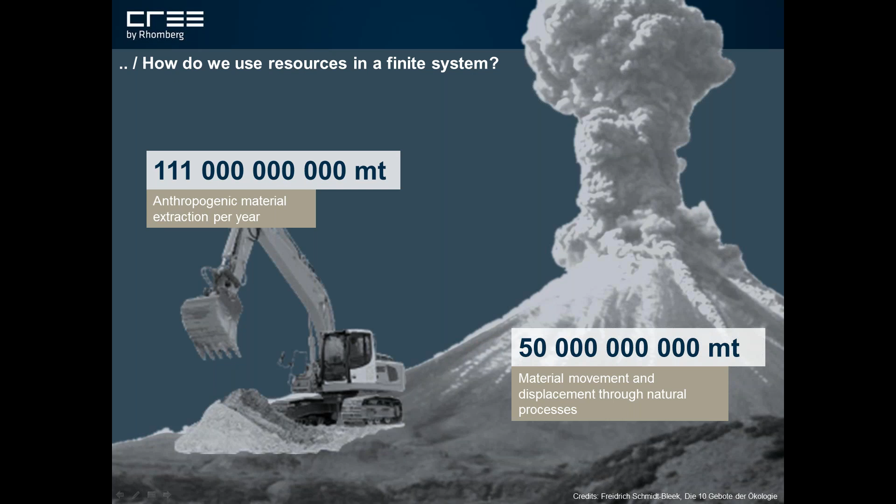Let's have a look at a bigger picture. Each kilogram of industrial products is responsible for an average of 30 kilograms of nature. This is not only the stuff and the waste that goes into the product itself, but also the energy that is used to transform natural ingredients into technical materials.

To relate this resource consumption to the environmental impacts that you might be more familiar with: just around 150 years ago, we as humans have been able to increase our ability to extract energy from the environment beyond the intake of food and the use of fire. In context of human history, the discovery of coal, gas, and oil seems like the blink of an eye.

Those fascinating fuels store billions of years of solar energy in a very dense and portable form. Just imagine yourself pushing a car 15 kilometers along the road, uphill and down - this is the service of 1 liter of gasoline to us.

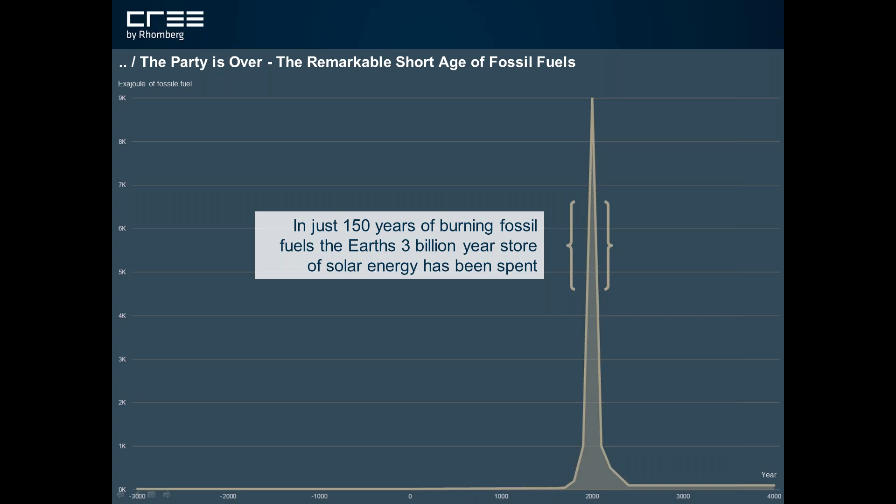Very soon we'll have used up all economically viable reserves. Let's try to keep this valuable stuff for the common good and emergency services in the future, and let's build our buildings with renewable resources. As one of my favorite writers on resource issues, Richard Heinberg, puts it, the party is over.

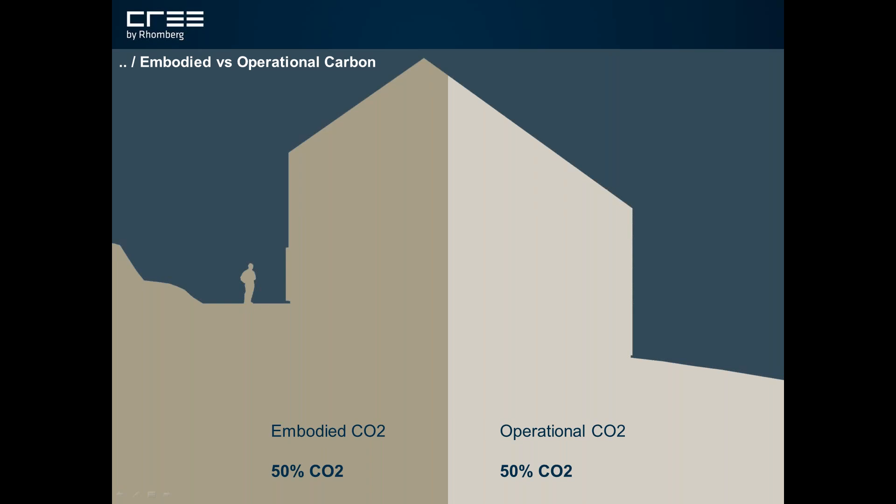So this diagram before suggested that the energy is the devil, and it is in a way, but we have to look beyond the obvious, we believe. As building design is moving towards high performance in regards to envelope and operational energy, like passive house or net zero, the embodied energy suddenly makes up 50% of the overall impact or even more.

And when you look at those emissions over time, you see that the first 50% of those carbon emissions are being released at day one or even before you build. And the second half then comes over time, over the building life of 50 or 60 years, depending on the definition of where you live.

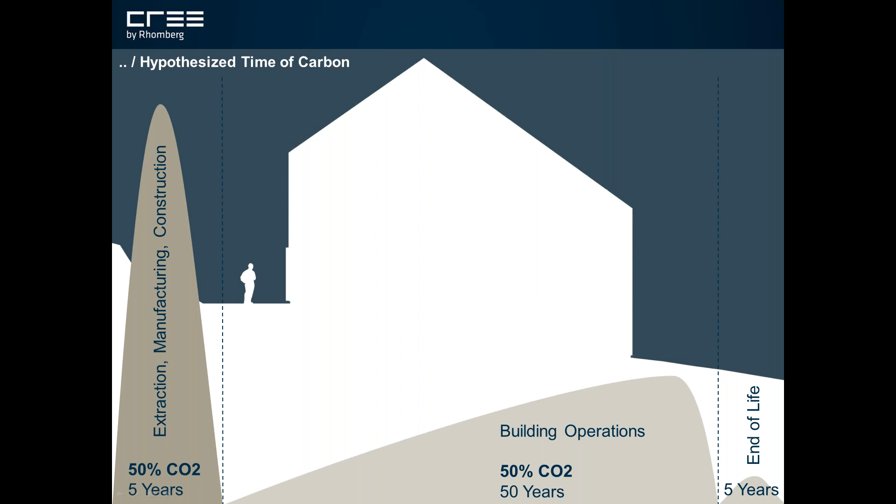And you might even hope during that time for more efficient energy generation technologies to be developed. So the one-sided discussion on energy and greenhouse gases distorts our view of the urgently needed radical reduction of consumption of raw materials. And it is the material consumption levels that presuppose the use of fossil fuels with its known impacts. To achieve the same kind of service levels and comfort of the current high consumption economy for a low extraction future, we need to dematerialize our economic processes in a controlled manner.

Metrics and action plans have actually been introduced and developed during the last 25 years by an international science community around the world. Well-known scientists like Amory Lovins, Richard Heinberg, Friedrich Schmidt-Bleek, and others clearly show a path on how we can redesign industrial production and improve resource productivity 4, 5, or even 10-fold.

Every material, product, or service can only be provided by interfering with the ecosphere. So let's take a computer, for instance. For producing this product, you need material from nature and you need energy. Many different materials from many different countries have to be mobilized in nature, extracted, processed, transported, and finally turned into thousands of different components needed for the computer. Equally, in order to make energy available, you have to invest materials like steel, copper, oil, and sand, even for harvesting solar radiation.

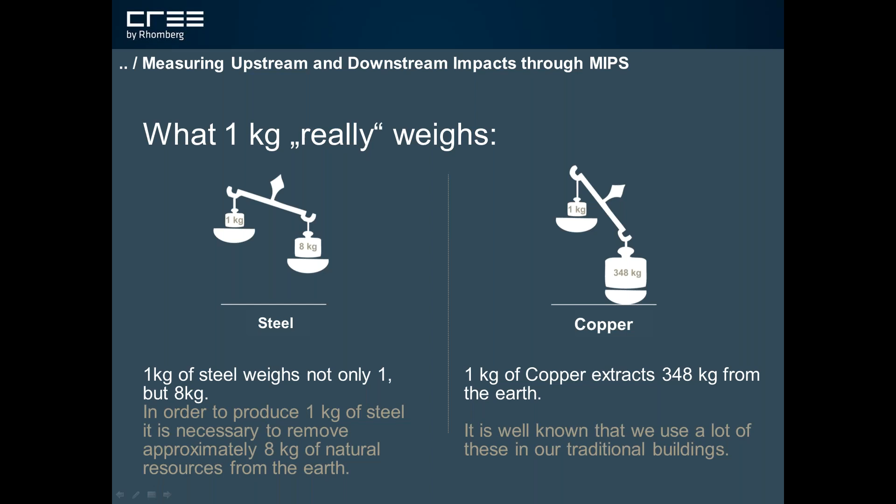So resource productivity and dematerialization is the perspective that we're using and implementing in regards to building design. Our building design decisions are driven by looking at optimizing the resource performance throughout the building life cycle.

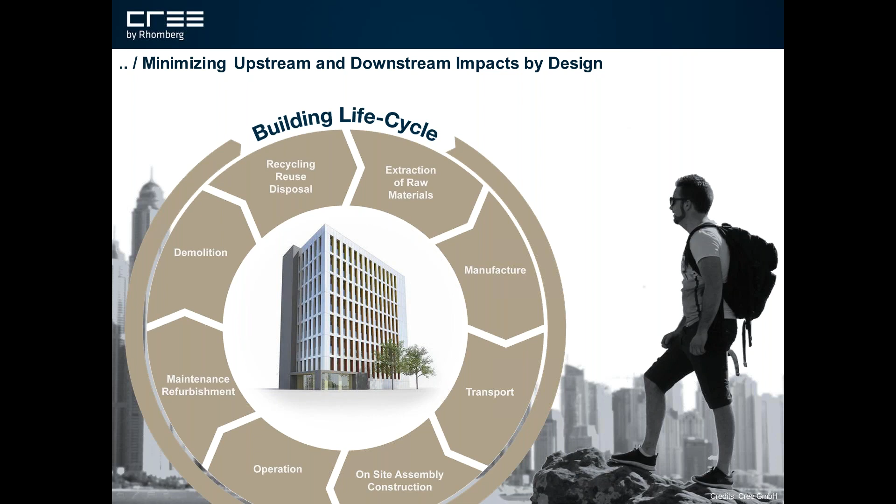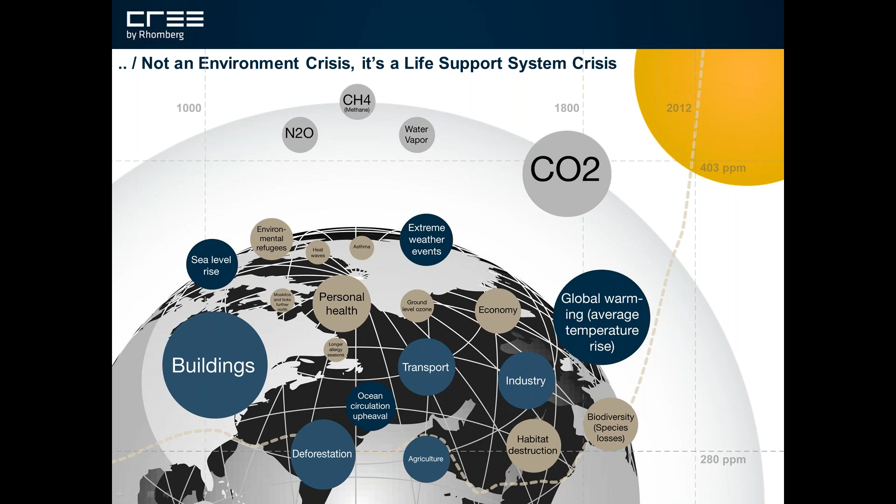So unfortunately, we're living in an era in which the existing systems are reaching their limits. Endless growth cannot persist in a finite ecosphere. It is actually those natural systems that support our basic human needs and life on this planet that we enjoy so much, like the clean air, the protecting atmosphere, nutrient cycles for food production, water systems, and biodiversity, that are being altered dramatically by this accelerated resource use nowadays.

So being the master of glass, steel, and light, the materials of his time, visionary architect and designer Richard Buckminster Fuller is often cited with the sentence, 'How much does your building weigh?' This is exactly the question that we're trying to answer during building design.

The ecological rucksack is a simplified proxy method to assess the impacts of products and services over the whole life cycle, from resource extraction to the end of life. And there are also other more detailed methods available, like life cycle assessment, and we'll talk about those later and learn about implementation in an upcoming webinar.

Yeah, so we don't have two planets, so let's plan for the one. And we were trying to do this when we launched the Lifecycle Tower idea. So photovoltaics is great, but we think we can do better than that.

Carbon is a key component of all known life on Earth. Climate change is the result of breakdowns of existing carbon cycles that were basically balanced for thousands of years, and these breakdowns are caused by us, so it's a design failure. Greenhouse gases extracted from their underground storage and put into the atmosphere make airborne carbon a material in the wrong place, at the wrong dose, and the wrong duration.

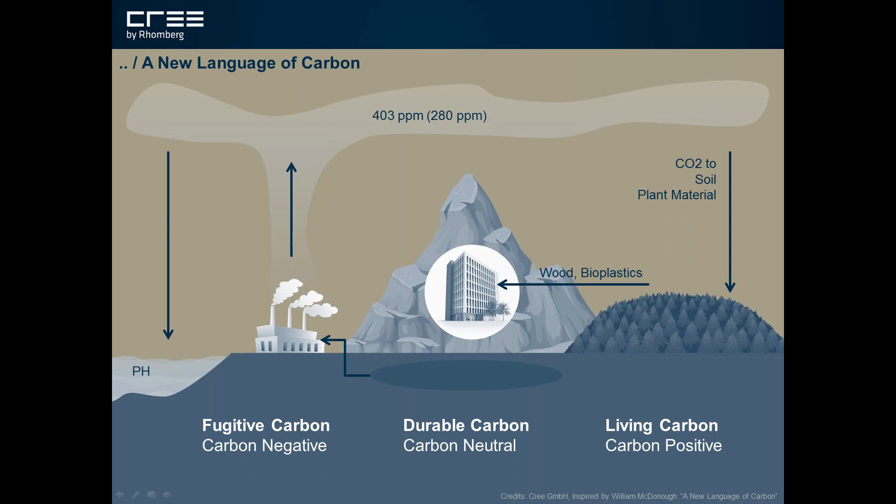So we look at wood from the perspective of avoiding carbon emissions from other forms of construction, but as well from the point of view of a potential carbon sink. We use visible wood in the support structures as much as we can. We just don't want to encapsulate it, for obvious reasons.

Reconnecting human beings with natural systems has all kinds of positive effects on their life. For example, these are just some bullet points from the research during the last two decades: there's lower blood pressure, lower heart rate, faster recovery from illness, lower pain perception, better creative task performance, better concentration task performance, and so forth.

But I personally think that we are in dire need for connecting to natural systems that go beyond the effect of worker performance and accelerated healing times. I think we need to do this to appreciate and value those systems that support our lifestyle. There is more literature on this topic, on the topic of biophilia, in the resource section as well, when the handout will be available.

With the accelerated demand for tall wood structures, legislative bodies will be put on the spot to increase legal certainty through evolving building codes. Some countries, states, and municipalities are now moving into standardizing the codes for taller mass timber structures. Today, in most jurisdictions, all buildings over 6 stories still have to be legally built with concrete and steel. Meeting certain provisions and proving equivalency, you can build with mass timber nevertheless.

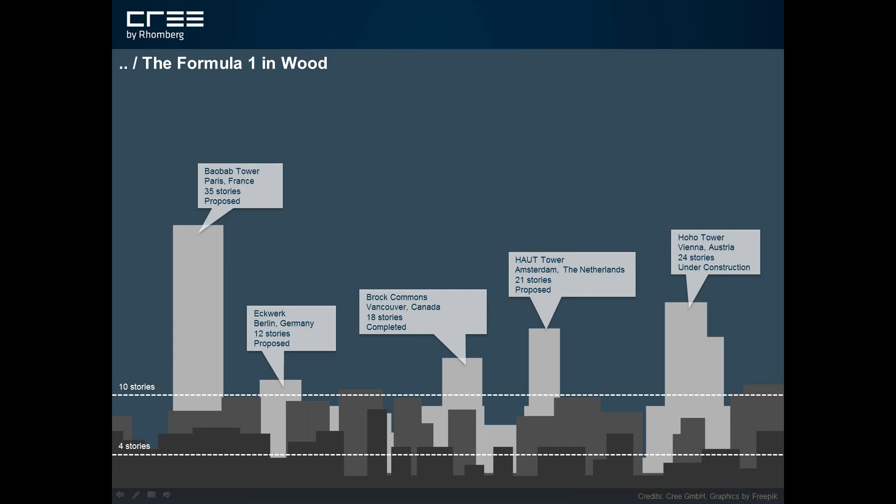These super tall projects do not really represent a fair share of the market yet, but they attract a lot of media attention, which is a good thing, as those projects will drive innovation in technology and help develop a level of confidence. If we really want to make a difference, we want to tackle buildings between 4 to 10 stories, as they make up the bulk of new urban construction. It is also this building height that offers a sweet spot in density for various reasons, from potential energy independence, transportation effectiveness, sense of community, access to nature, as well as comfort and resilience.

I'm going to read to you 3 numbers that try to answer the question on the slide, and let's take those numbers with a grain of salt - I have not calculated those myself. The first statement is: the amount of wood used as the main building material for a 30-story Lifecycle tower regrows in the United States forest within 3.5 minutes.

Second, the wood used for the IZM building, which uses the CREE system, regrows within 1 hour in the Austrian forests. And 1/3 of the current forest regrowth in Germany would be sufficient if all new construction in that country were built with wood. So let's not use wood as fuel - let's have it go through a durable phase, or as many durable phases as possible, before that.

The use of wood for buildings in ever larger volumes needs to go along with responsible management of our forests worldwide. There is a lot of potential for reforestation in areas that have been harvested and transformed during the last 500 years. So from my European perspective, the Mediterranean comes to mind.

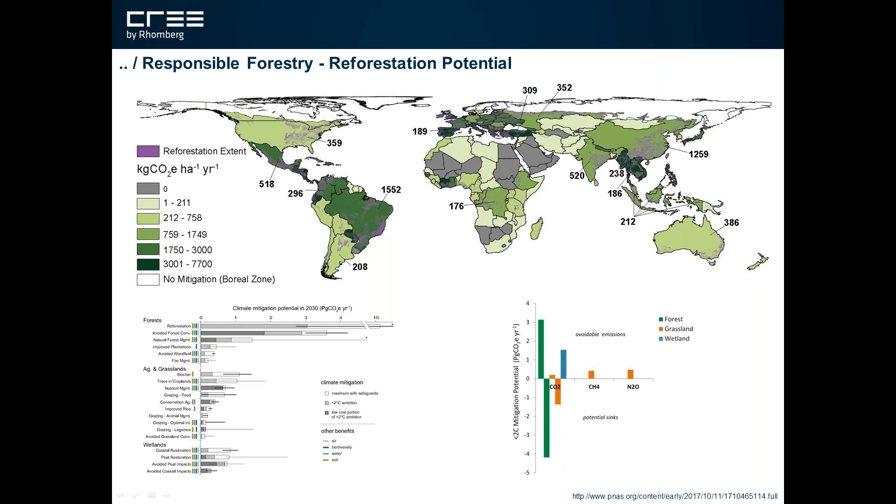Centuries of deforestation have turned Spain's lush forests into barren scrublands, making them vulnerable to erosion. The same applies to many other areas in the world - tropical forests especially are of concern. So wood is the best material available to us, but we still want to be very mindful in its use.

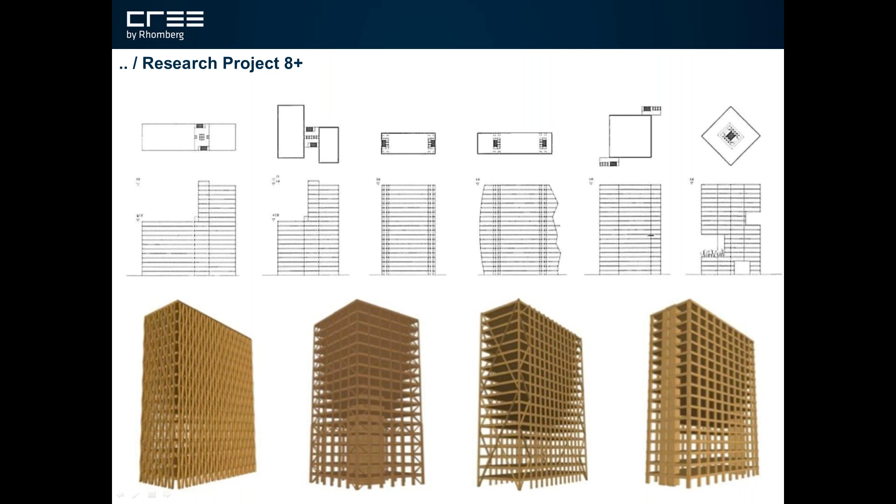As a first step in the founding of CREE, the technical feasibility of buildings in timber construction was investigated as part of the so-called 8+ research project, which began almost 10 years ago in 2007. However, this did not take into account the commercial marketability of the developed concepts or its chances of obtaining approval under construction law. Following that first step, our cooperative and multidisciplinary research project called the Lifecycle Tower Project was initiated under the lead management of Rhomberg Construction.

It was basically proven on paper that you can build 100 meters tall with wood. So 10 years later, we not only have written results, but also the proof. We will see project examples in a moment.

CREE is rooted in the region's tradition of building craft and local materials. The company CREE that I'm representing today is a startup spin-off from Rhomberg Construction and is based on the Lifecycle Tower Research Project. CREE stands for creative resource and energy efficiency.

Hubert Rhomberg is the driving force behind CREE. Hubert serves as the managing director of Rhomberg Holding and Rhomberg Sersa Rail Group. As a fourth-generation family-owned company, Rhomberg Construction is obviously especially concerned about innovation and long-term planning. He wants to make a difference in his segment.

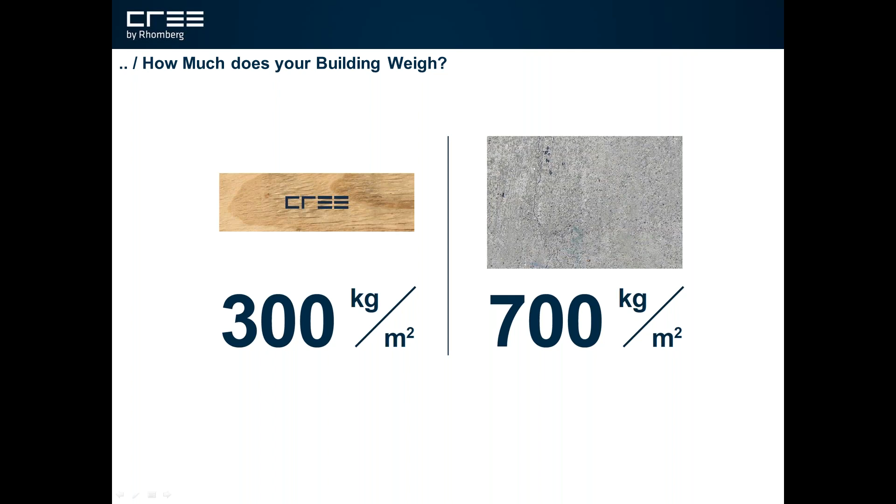The previous structural skeleton diagram was developed asking the same question posed before by Bucky Fuller. We're basically minimizing material resource, no matter if it's the concrete or the wood. We only want to use it where it's actually absolutely necessary.

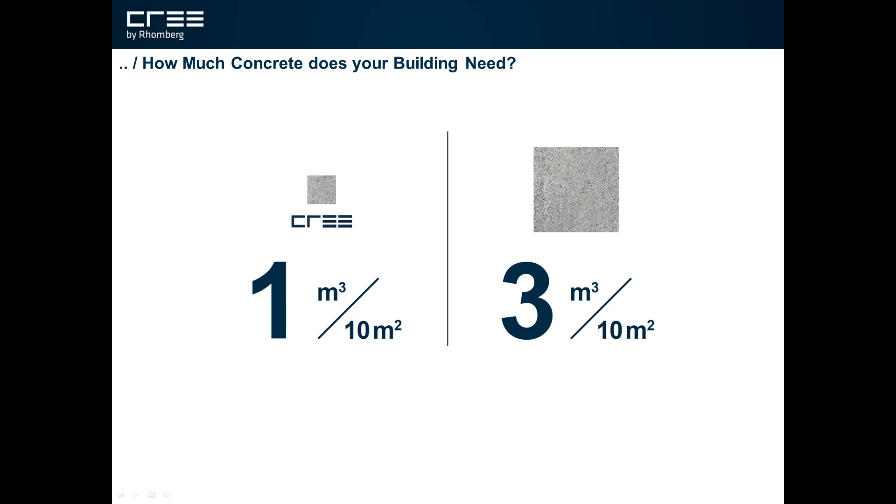For example, the prefab concrete top is only between 80 millimeters to 100 millimeters thick, compared to around 300 to 350 millimeters for similar spans with cast-in-place concrete skeletons.

Through that, we reduced the carbon from less concrete, and with sequestration in the wood, by 80% for the structural system.

The concrete creates the non-combustible layer separating the individual stories. Together with the glulam beams, composite action is created. How wood and concrete is connected, we see in a moment.

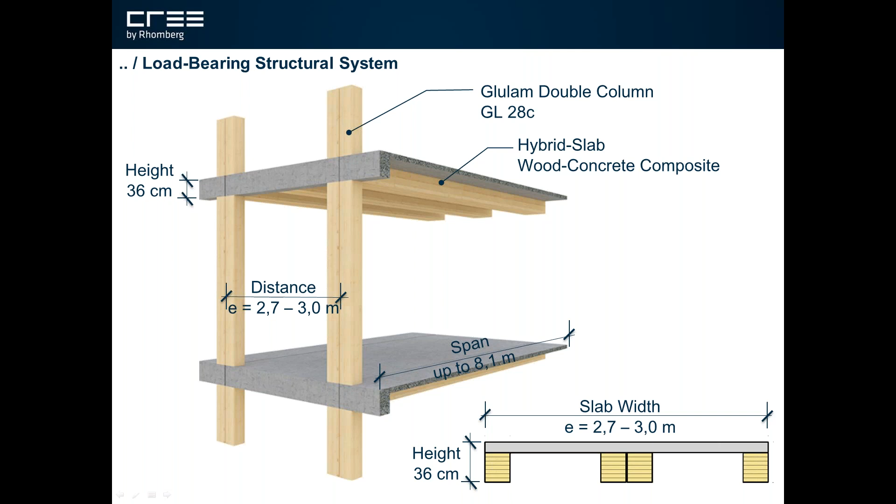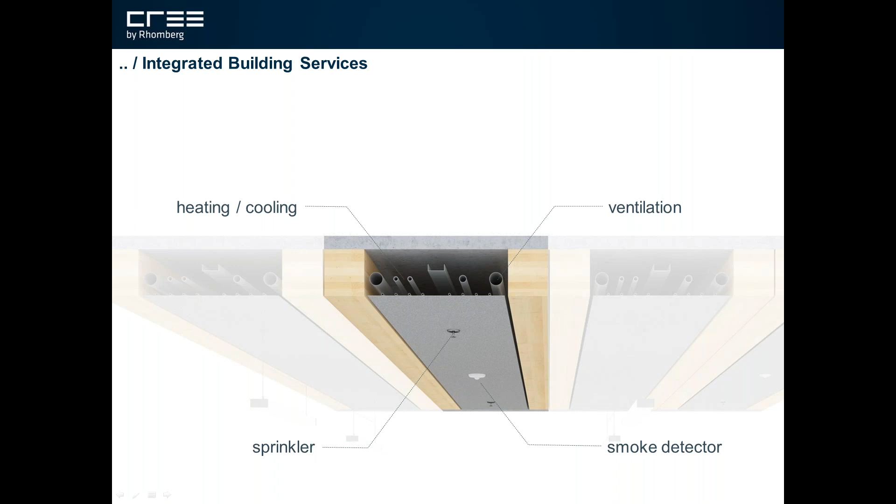All columns in this instance occur in pairs at the junctions between the modules in the facade plane, each one bearing one floor element. The space between the beams provides space for services. Chilled beams provide radiant heating and cooling, and other equipment like lighting, ventilation, smoke detectors, and a potential sprinkler system is also arranged in the void between the beams.

With the next couple of slides, I would like to summarize some of the core aspects taken into consideration when the Lifecycle Tower system was thought up. The system components are intended to be resourced and manufactured as locally as possible. Studies show that the wealthiest economies are precisely those with the highest percentage of locally owned businesses.

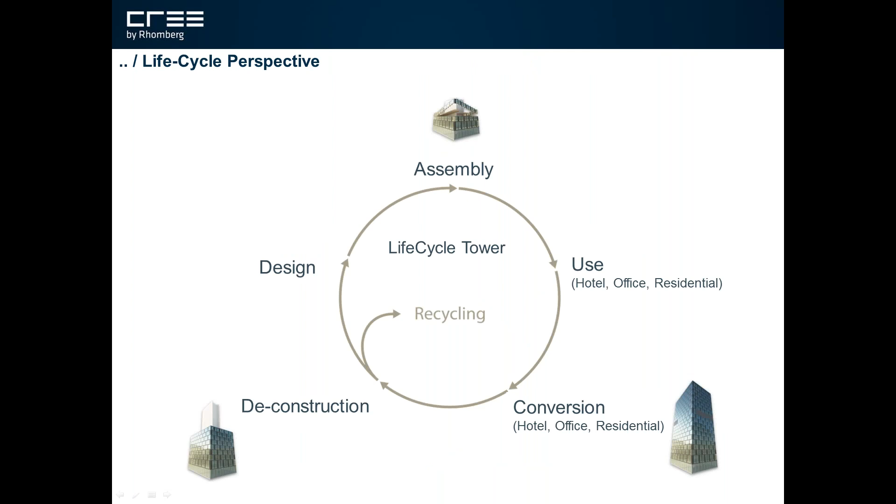We had heard before why lifecycle thinking and systems thinking is so important to us. In a well-attuned process, communication failures between architects, designers, contractors, and procurement teams compromise the successful outcome even more. We're convinced that our aspired outcome will work only if we leave our silos and work collaboratively together from day one.

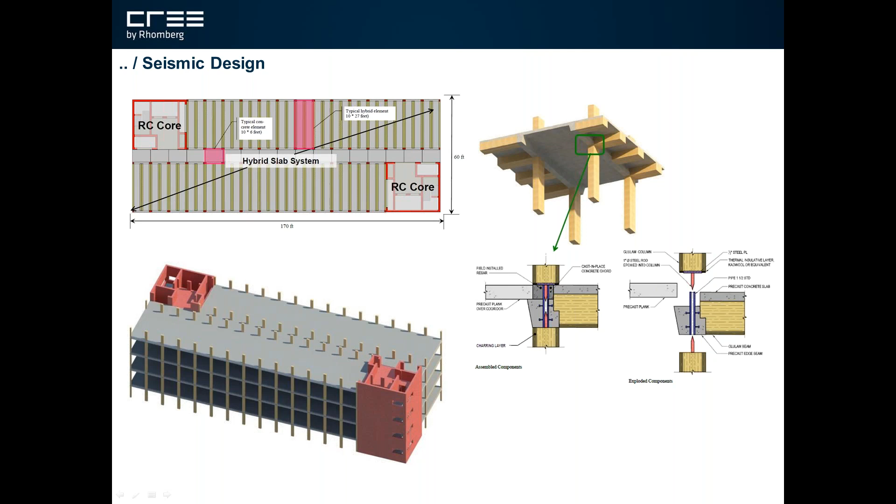So considering different seismic zones, we had collaborated with Arup engineers in the San Francisco office to revisit and adapt the LCT system ideas and approach for high seismic zones as well.

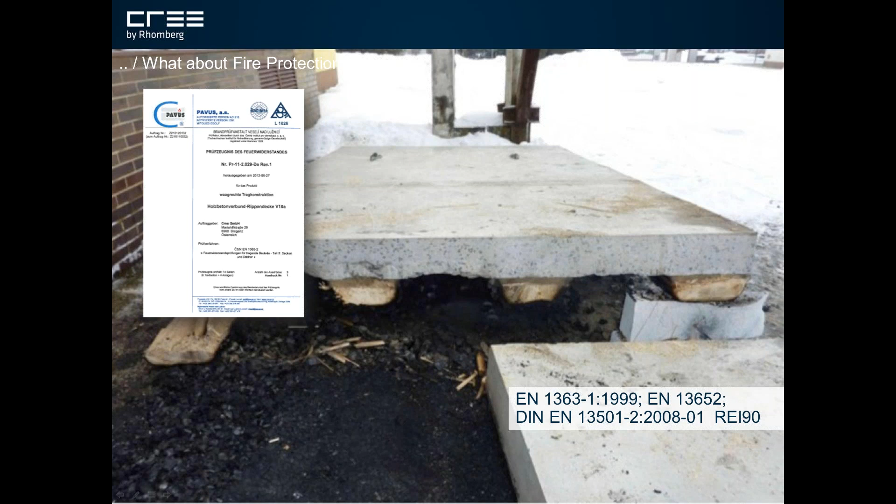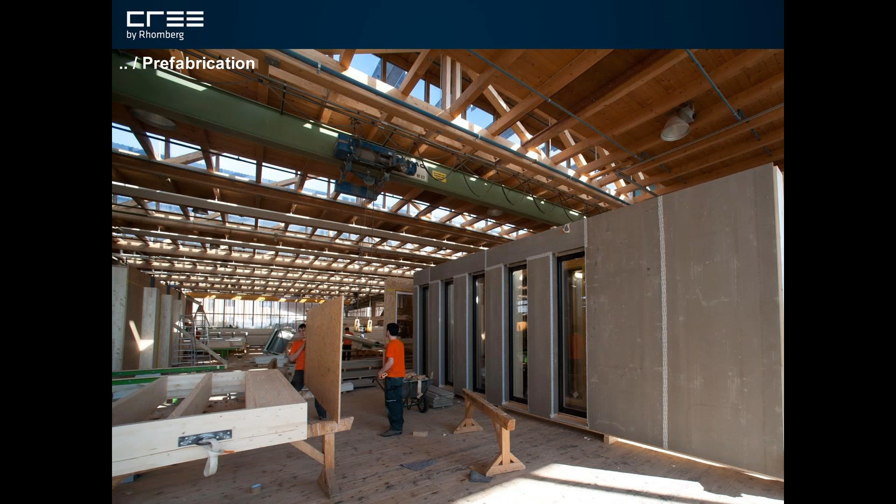Austria has a long history of prefabricating high-performance building components out of wood. The process begins with software used to cut lumber using CNC machinery. The members are assembled in a carpentry shop under controlled environment where windows, insulation, sheeting, vapor retarders, and finishes are already installed. The components are made to tight tolerances and can be quickly assembled on-site and meet the most stringent air tightness requirements, which is an important precondition for operational energy performance.

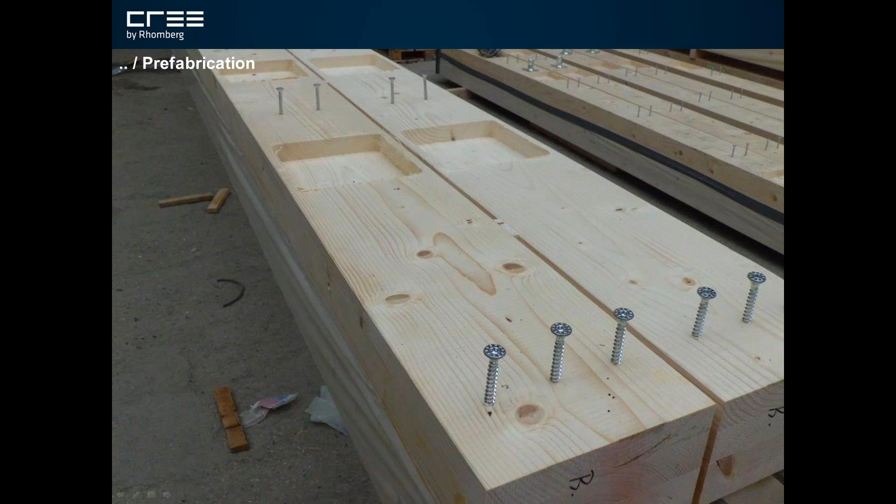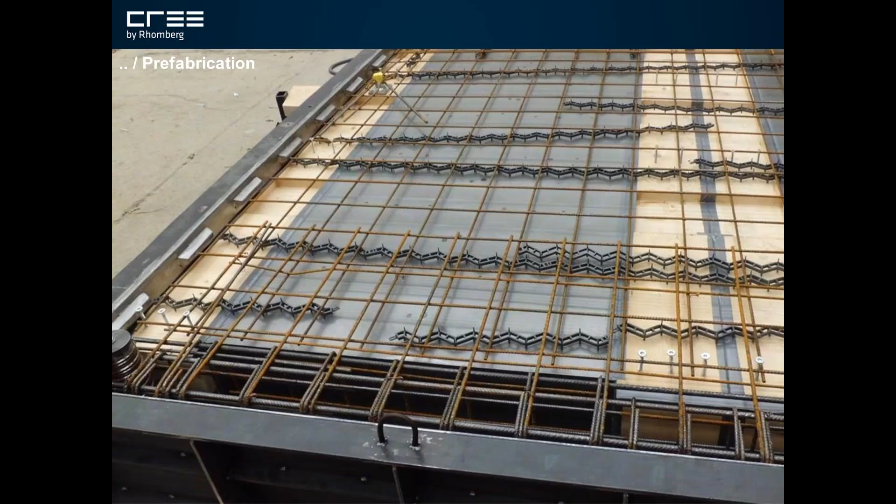Just think of the passive house requirements for air tightness. So moving from the wall panels to the floor panels, you see the glue lam beams before they go into the formwork for the concrete. You see the notches in the glue lam beams, used to create composite action between the wood and concrete for most of our buildings. When the concrete is poured into this prepared formwork, it will flow into the cavities in the beams and interlock with the glue lams.

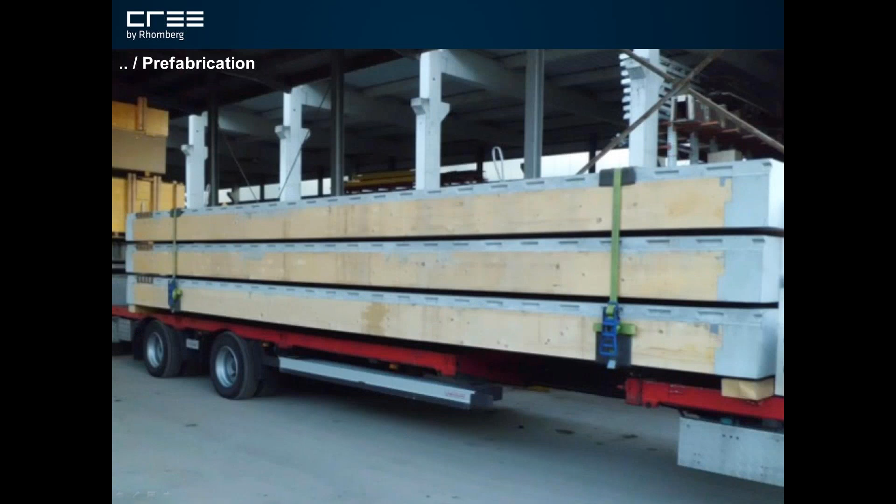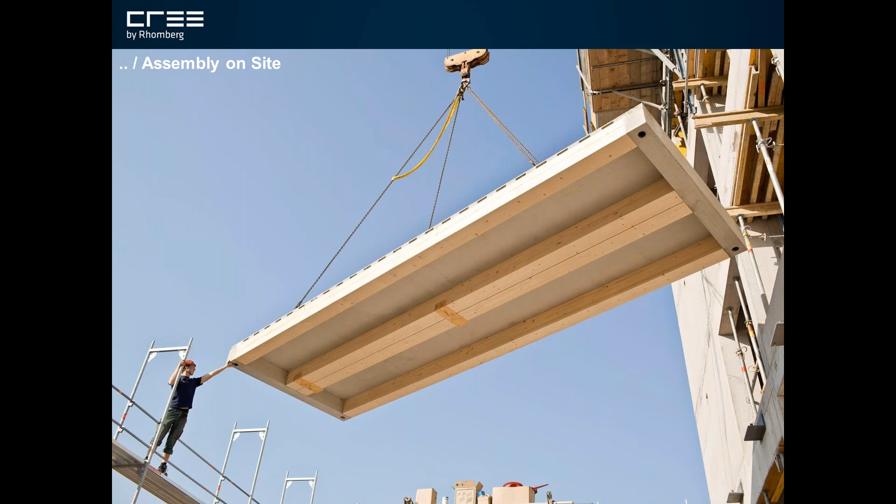So these are just three of the slab panels flat packed and ready to go to the site. And with that, we move to the site for assembly. In the instance of the LCT-1 building, the combined facade with the structural column element is being installed in this picture. Then the hybrid slab is craned in. You notice the 4 holes at the corners in the concrete edge beams, and it is threaded via the holes onto the pins in the column that you see in the background. This steel component ensures minimal tolerances in height, even for a tall building - just a couple of millimeters, even 10 stories high.

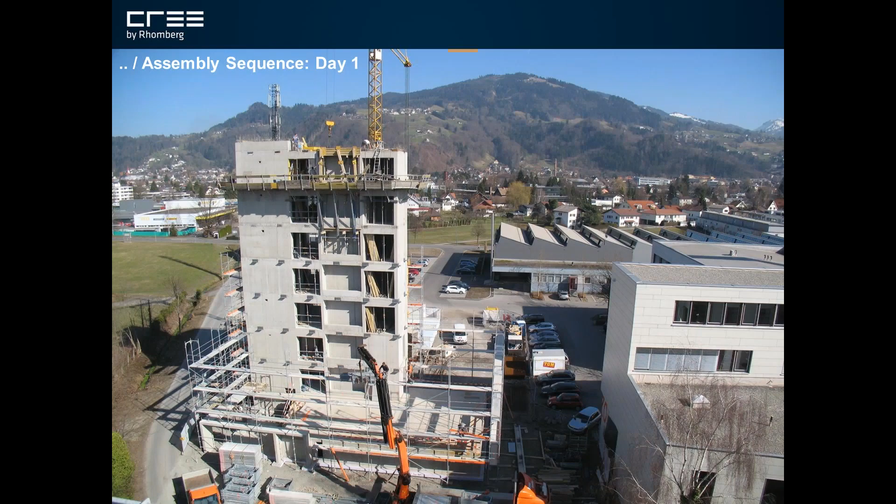After the central core had been erected using traditional cast-in-place concrete, the CREE team started assembly of the prefab superstructure. I'll show a hand-animated sequence where each slide represents one day of the assembly process. It was actually really hard for the scaffolding contractor to keep up with the erection. Basically there was one story finished per day, covered during the night in case of potential rain events. The scaffolding was needed for the aluminum facade to be installed later on.

So from the construction sequence of the LCT-1, let's move into a little project portfolio section. What you will find in the project section is that even though we reduce production variability with components and standardized work processes, the end product is always as unique as its site conditions and project goals.

This 8-story lighthouse project is intended mainly for use as an office building. It was perceived by Rhomberg Construction as the client to prove the case of all the research work done. The top escape level is at 21.95 meters, so it's just 5 centimeters below the high-rise definition in Austria.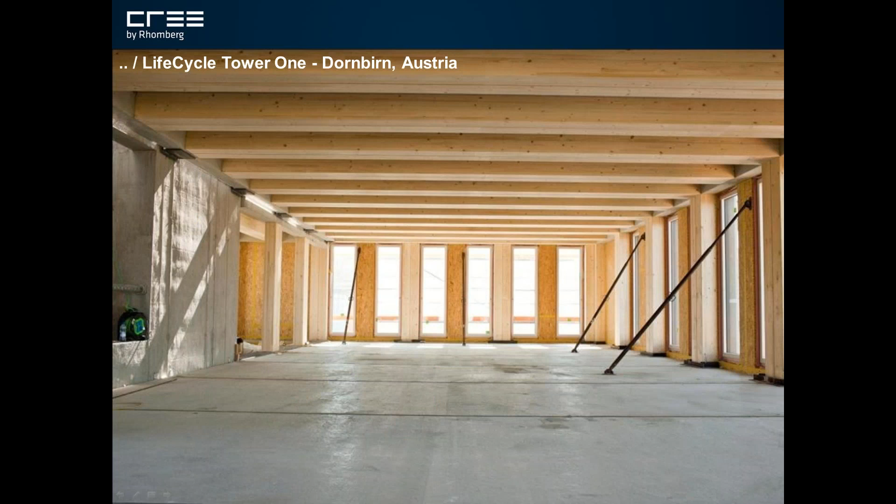So back to the assembly phase for a moment - this is the wettest state during construction, so no curing of concrete, no drying of materials from rain events, ready for interior fit out. That's the same space a couple of days or maybe a couple of weeks later. I wasn't personally there during construction.

Same space again. This is a typical open office situation in the LCT1 building. In addition to its main office use, the Lifecycle Hub on level 1 and 2 is open to visitors as a showroom for sustainable building solutions.

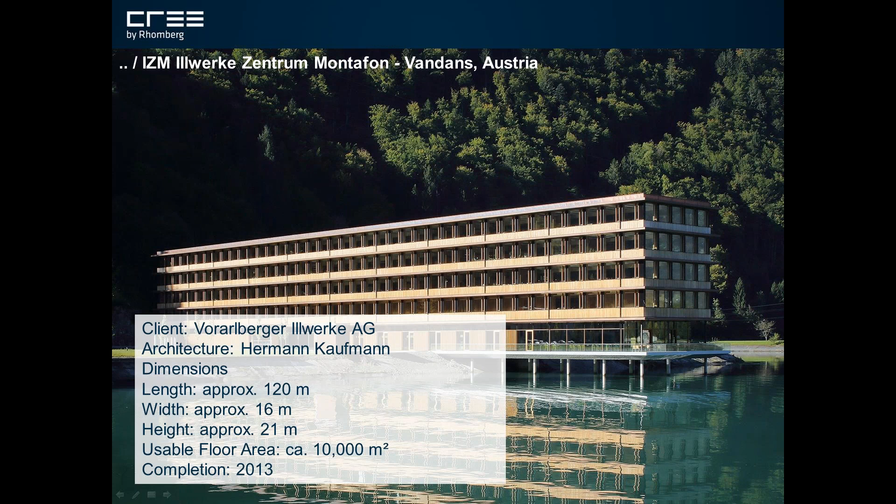Let's move to the second major project, which was the first commercial application of the Lifecycle Tower system, despite the fact that it's not a tower. The building serves as a workplace for administration and engineering services for the local hydroelectric power utility Illwerke in the Montafon Valley in Western Austria. The project was initiated through a design competition won by Hermann Kaufmann Architects in 2010.

Local timber from the western provinces of Austria was used almost exclusively for the structure. The oak wood for interior fitting and exterior cladding was sourced from deciduous forest just across the border in the south of Germany.

The building was built with around one third of its length reaching out into the lake, so sheet piling was used during construction for that purpose.

The IZM primary energy consumption is under 30 kilowatt hours per square meter per year, which is really low even for passive houses. The heating demand, under 15 kilowatt hours due to passive house standards, is completely recovered by a waste heat system from the local power plant, and a heat pump system covers the cooling demand.

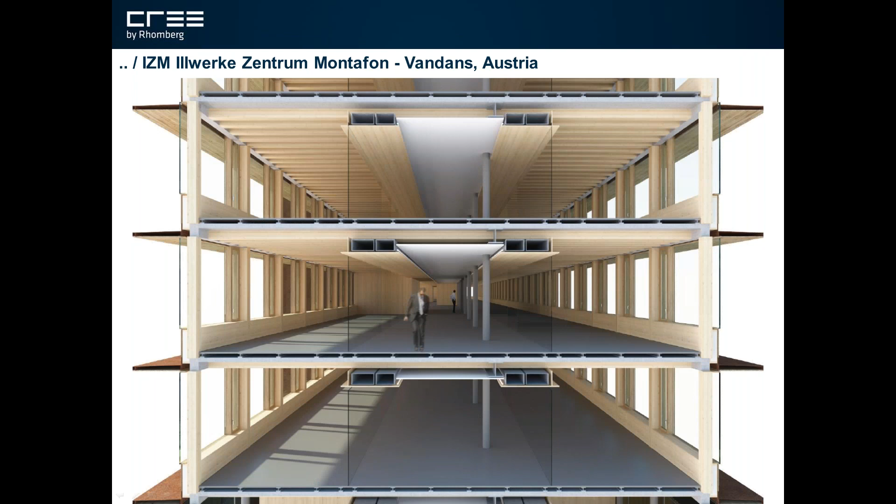The wood elements of structure and construction are left visible within the building, so no drywall linings were needed. Glulam double columns on the outside, as well as fire-resistant concrete-filled steel tube columns in the middle grid, carry the load of the LCT timber concrete hybrid slab elements.

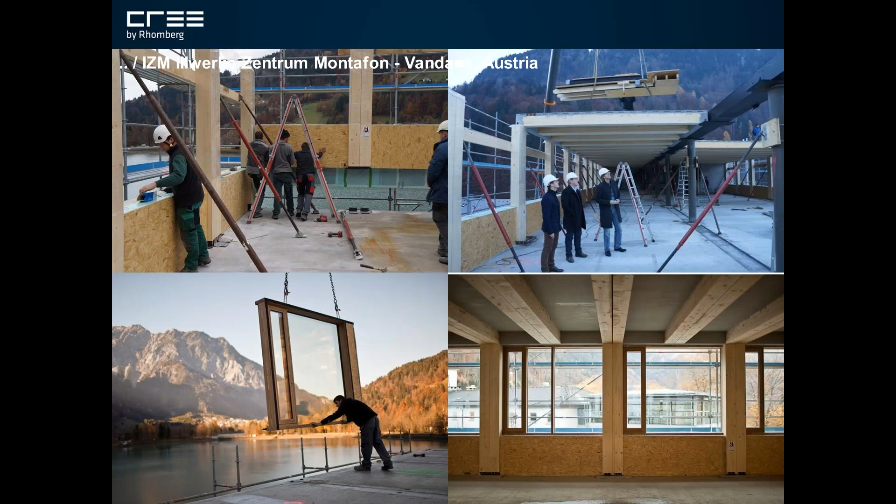A strict facade grid pattern glazed above desk height lends the building transparency and spaciousness. The projecting roofs act as protection from both weather and glare.

In situ reinforced concrete construction was carried out on-site up to the ceiling level of the ground floor and for the two access towers. After the concrete work, it took six weeks to assemble the shell, or core and shell, of the building, including the facades, using the LCT system.

The building services are integrated within the structural rhythms. The building has been certified by the Passive House Institute, as well as achieving platinum level with the German Green Building Rating System, DGNB.

Energy and carbon studies were undertaken comparing different design alternatives, and those studies demonstrated that the IZM as built has only 46% of the carbon footprint compared to an equivalent building with a conventional structure.

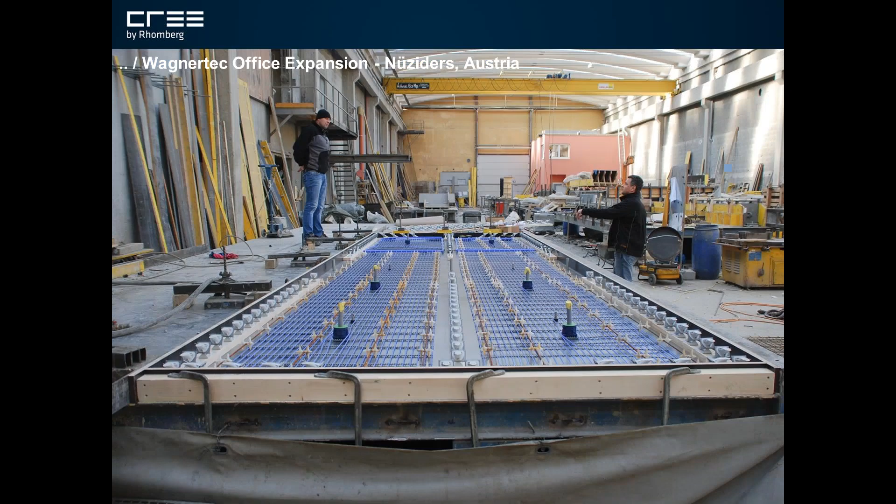The next building we see here was actually an existing one-story production facility that was expanded vertically.

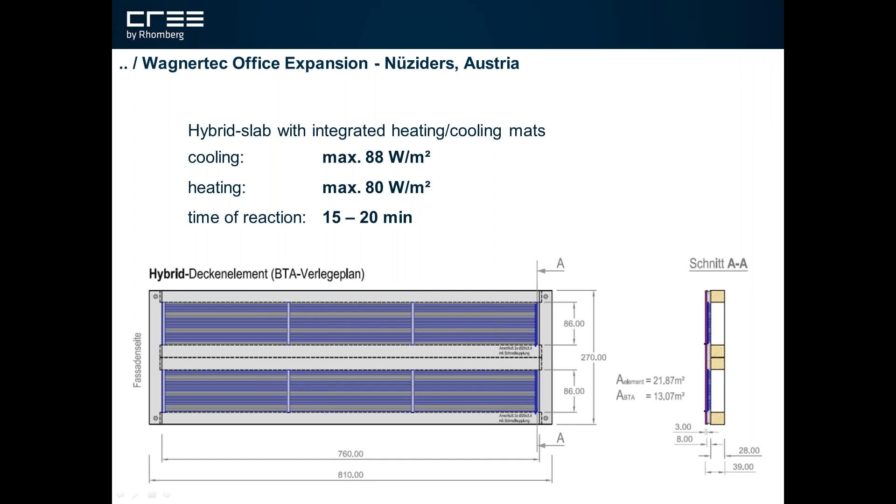The 80-millimeter prefab concrete slab elements were cast in the factory, and you see the capillary tube system in the concrete that provides the capacity for heating and cooling. This was a different approach in this instance.

A timber connector system was used for dry connection of the prefab concrete slab with the glulam beam on site. Full thread screws develop composite action and give this hybrid structure a high strength-to-weight ratio. Another benefit of this connection type is that the edge beam can be made in timber as well, so the column position is not dependent on the slab width, which is driven by road transportation.

Heating and cooling was achieved with the activated concrete slab, so no mechanical equipment was needed between the beams in this instance.

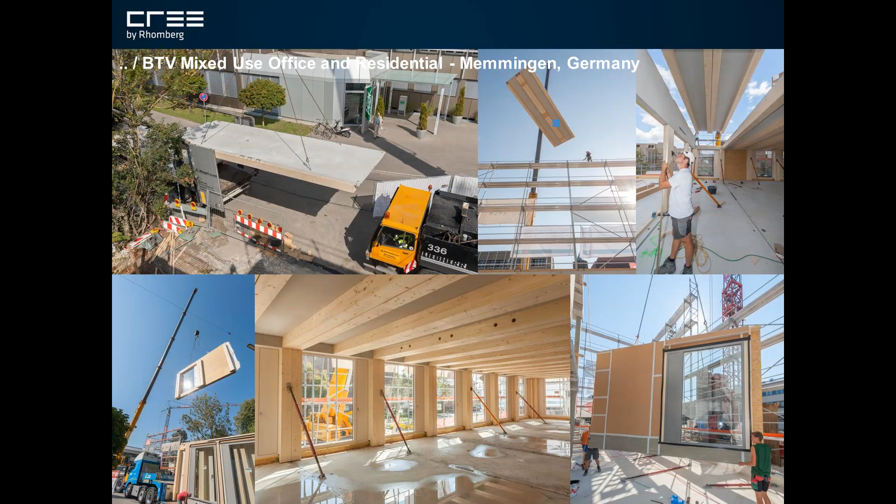This is the project that I did get my hands-on experience with, in design, rationalization and documentation. A rather small project, but experiencing the building assembly when you are on site, these 8 by 3 meter slab panels are just huge when they fly over you and are being craned into the construction site.

This was the first mixed-use typology in the Lifecycle Tower system. It contains commercial space and office on the bottom two floors and residential on the top floor. This is just a peek view into the office space of the main tenant.

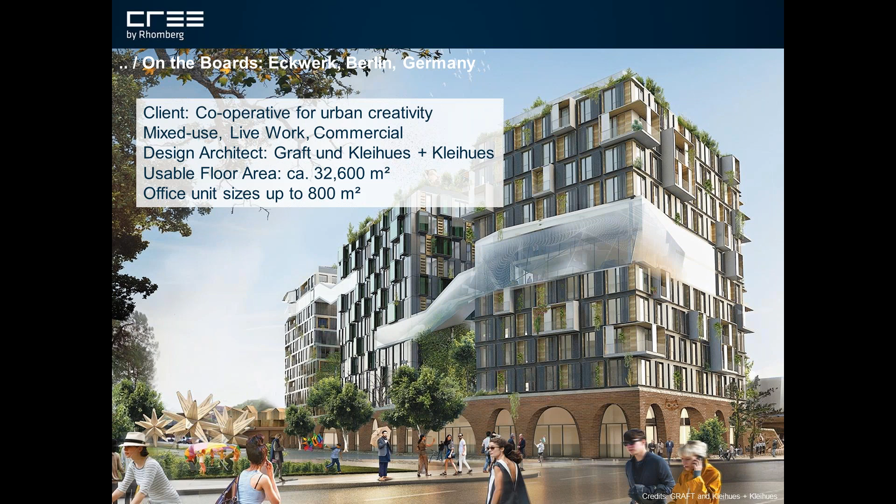Moving on to what's on the boards: the Eckwerk in Berlin, Germany, will be an innovative research and production hub for the vanguard of the next generation of IT companies, a place where long-term and sustainable business models are developed and implemented. You see the connecting walkways, called the experience path, that weave through the project site and promote encounters between occupants.

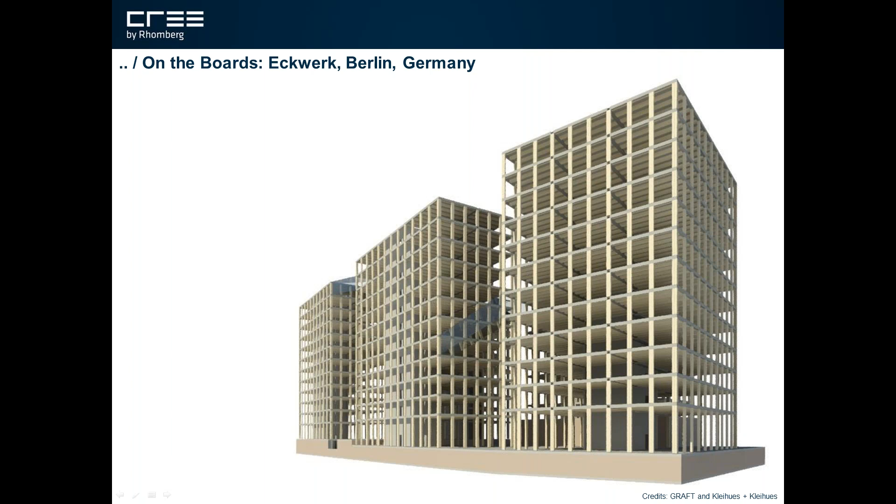After receiving a design proposal from the client's architects, the CREE team, together with the design architects, rationalized the design, which was thereafter called the Eckwerk 4.0, following extensive review and streamlining of various design categories from fire protection to heating and cooling, ventilation, structural spans, and method of construction, while keeping the design intent.

This is actually a rendering of version 4.0. While keeping the design intent, the price estimate for the project could be reduced dramatically.

The expansion of the existing Rhomberg headquarters in Bregenz, Austria, will be a platform for implementing and testing IoT concepts based on sensors and control systems to further optimize the service that a built space can provide to users.

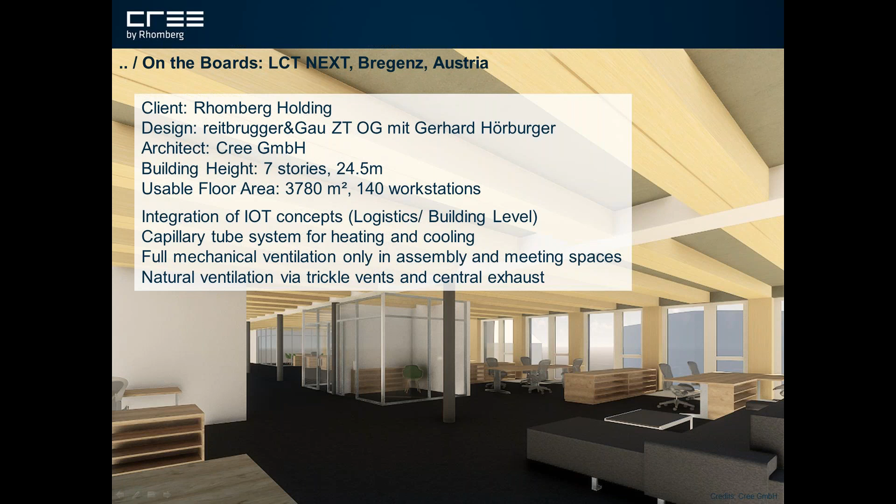This project is in early concept development.

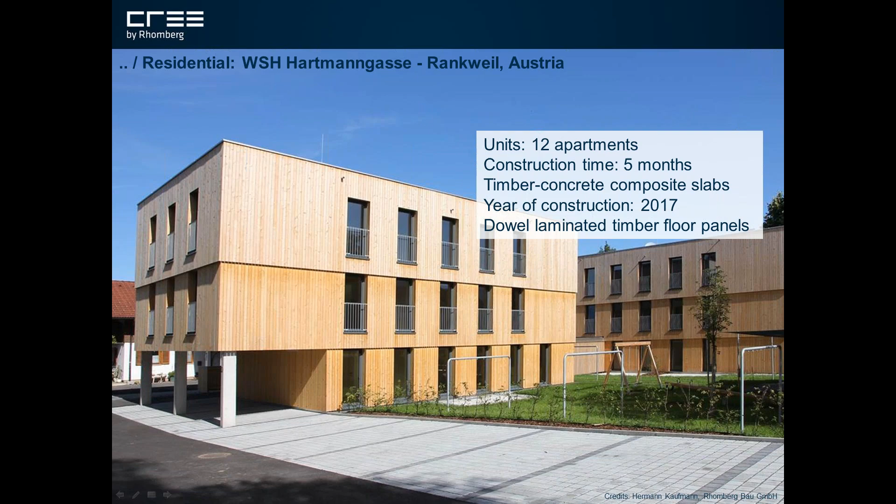So last but not least, some timber projects that come out of the Rhomberg group and showcase the expertise in prefabricated timber construction beyond what CREE has developed so far. The CREE team collaborates constantly with those subsidiaries, and so we mutually benefit from the expertise and exchange between those specialized internal groups, especially in regards to the bandwidth of available engineered timber products and their application.

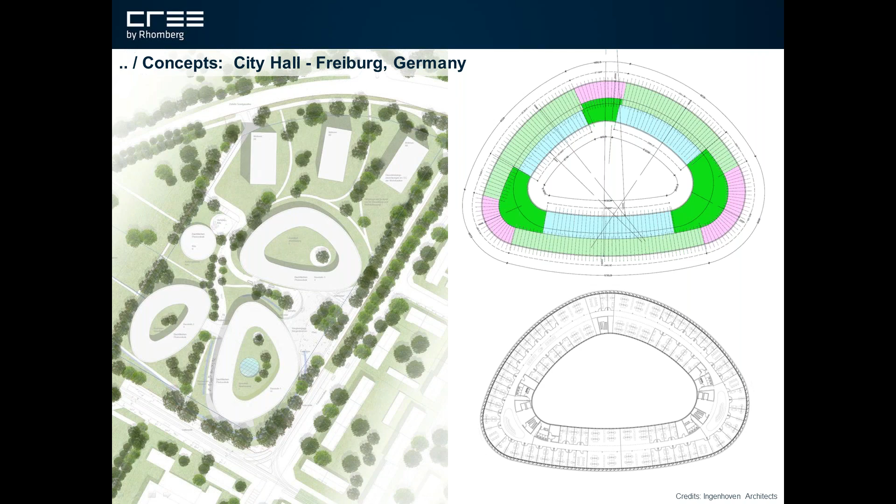So I want to show you just one more concept that actually demonstrates strategies that we use to rationalize a rather unconventional shape for prefabrication. So also these kind of footprints are possible.

So in the context of this project portfolio, I would like to announce that the production of CREE hybrid slabs has recently started in Singapore. In the beginning of 2016, CREE had decided to license the intellectual property rights and know-how to general contractors outside of the German-speaking countries. Singapore was the first country to acquire a license.

This year, CREE has also entered a license agreement in Denmark, as well as in the United States. On the east coast of the United States, we're working with an established modular construction company that was focusing on steel so far, called Full Stack Modular. CREE will also expand to Luxembourg, Belgium, Norway, and Sweden in 2018.

So how do we make high-performance prefab work for us? However you want to call it - digitalization, Industry 4.0, Building 4.0, virtual design and construction, or just building information modeling - it's almost all the same thing to me.

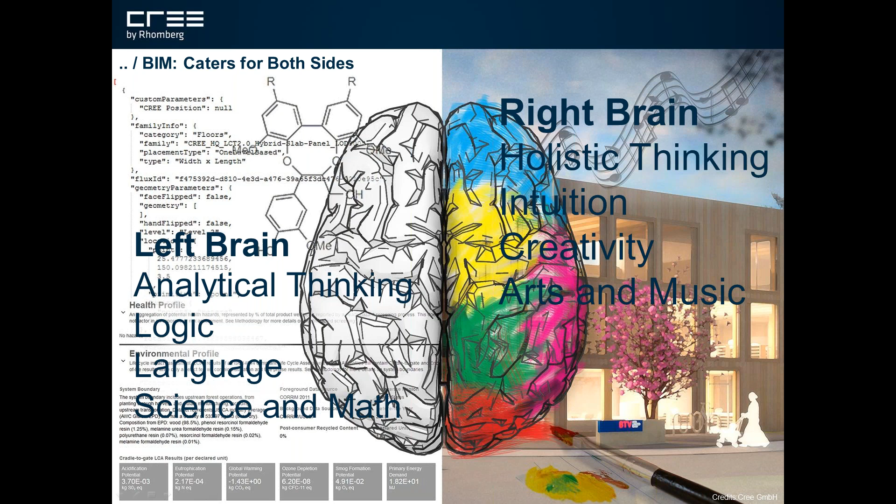Used and implemented right, these tools and processes are really conducive for the ambitious designer that wants to connect tectonics and beauty with metrics and performance intuitively. Don't fear due diligence to achieve resource and carbon performance goals. You can focus on the things that you love to do and collect the necessary metrics as you move along the project.

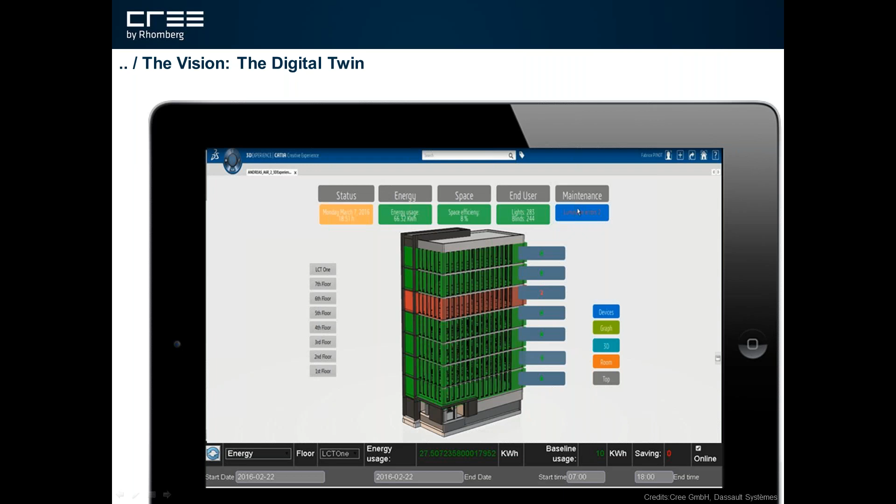The digital twin throughout the building life, from concept through occupancy to building reuse and to urban mining even - that is our vision.

So we developed a digital implementation strategy, and it is a moving target as our perspectives change with experience and every new project, and also technology is developing fast. But basically...

So if you really get into the nitty-gritty of implementing building information modeling, there's just a huge ecosystem out there that is available, catering to different aspects of building information modeling.

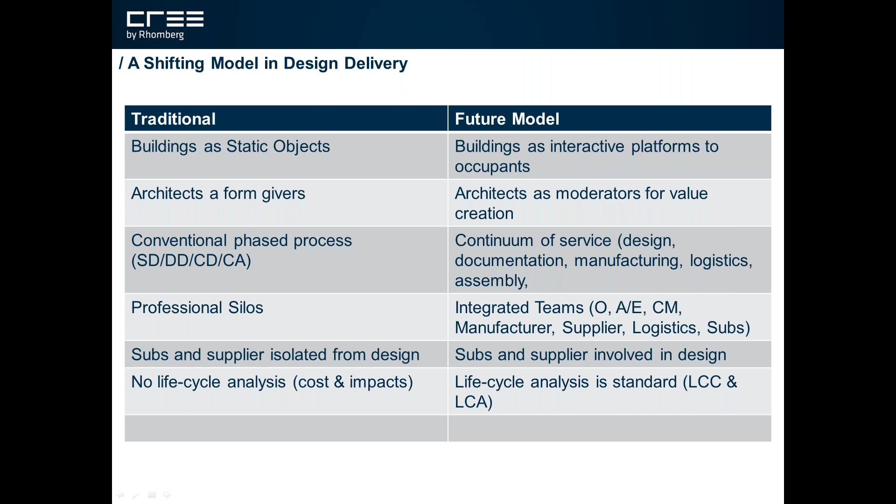Depending on how confident you feel in regards to the use of BIM tools and coordination tools, we suggest a certain depth of implementation.

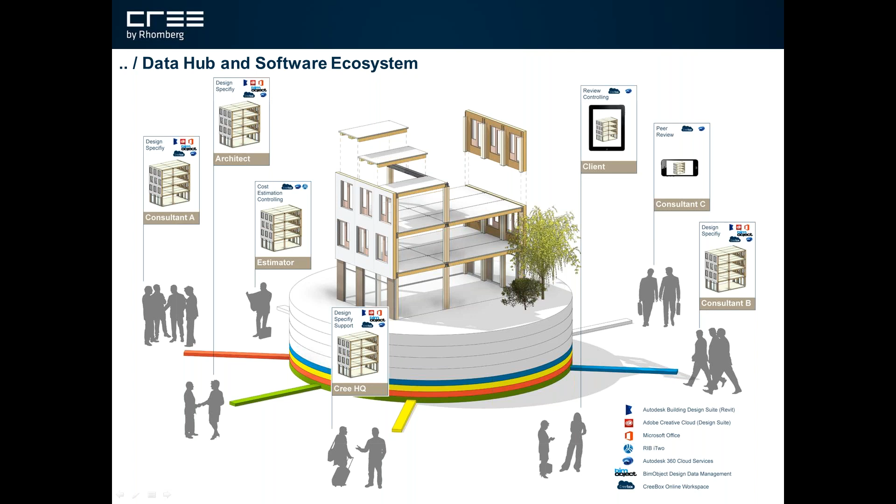In our BIM level 3 scenario, all stakeholders want to feed their current project knowledge in real time into a central repository. And this diagram also indicates some of the choices we had made in regards to software.

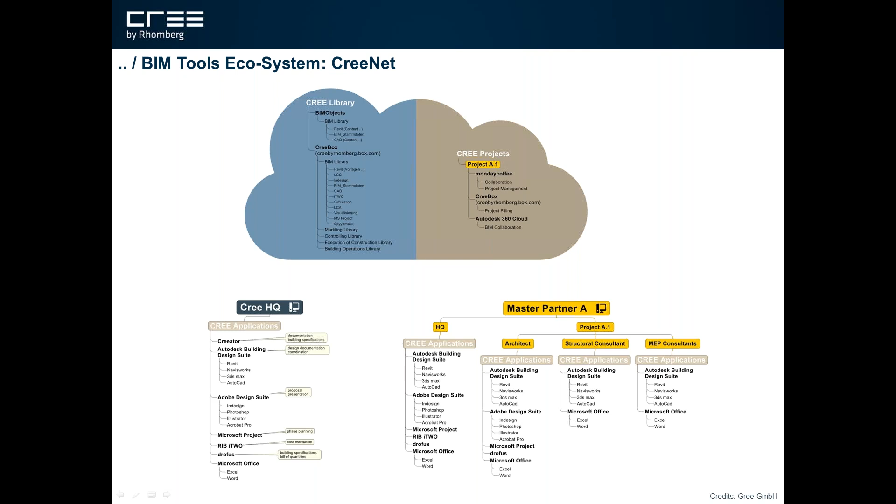Using the selected set of tools, we have also developed a collaboration and data exchange protocol that can be used no matter where projects are located. I'd just like to mention that all this technology is not replacing face-to-face communication between the stakeholders. It is just a tool that helps out.

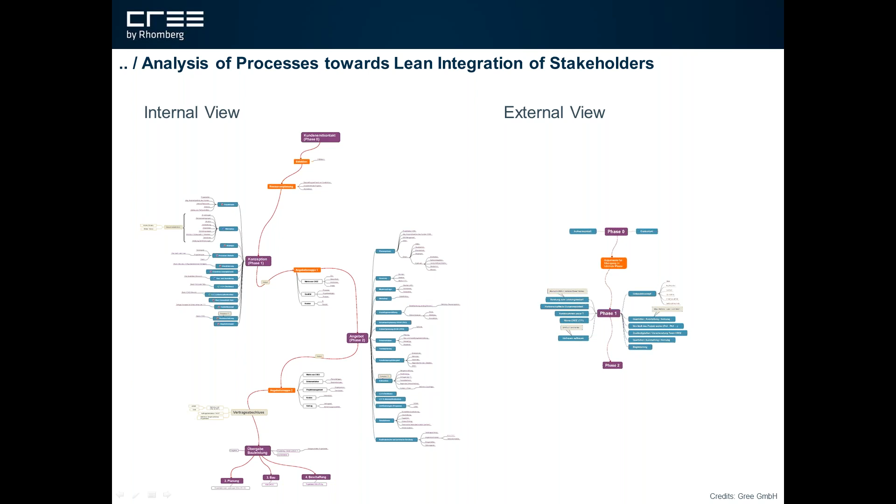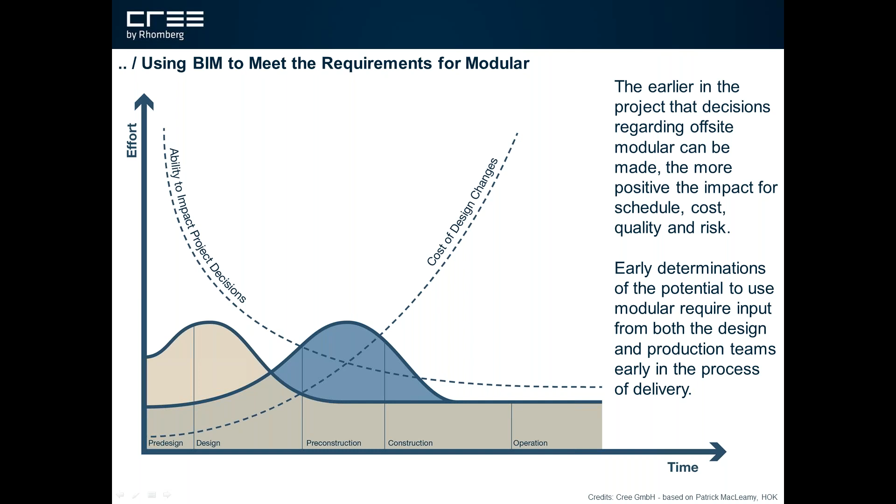We're looking at client expectations as well as internal process optimization to move towards lean design and construction processes. You've probably all seen the same diagram, based on the famous Patrick MacLeamy diagram. But in prefab, with its interwoven supply chain and fast-track schedules, the flow of early and accurate design information is even more important than in conventional design-build processes. The earlier in the project that decisions regarding offsite modular can be made, the more positive the impact will be in regards to risk, cost, quality, and schedule.

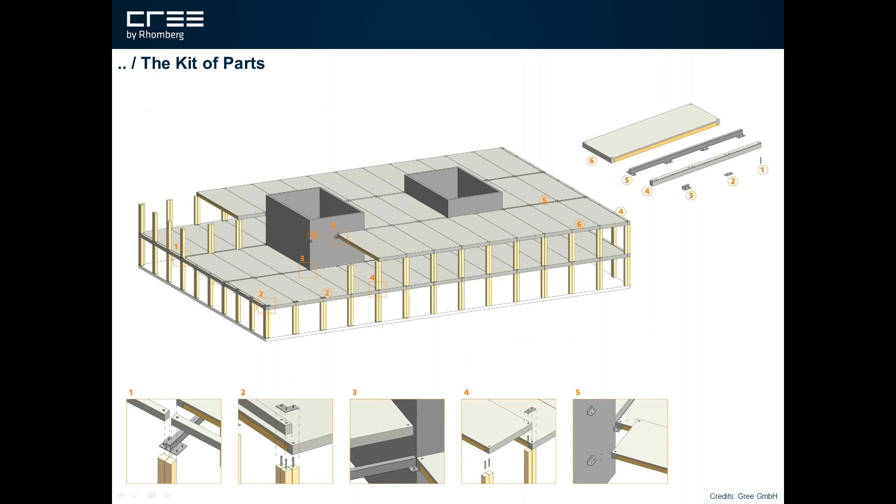From the ego to the Lego principle - this was a tagline in Hubert's recently published book, and we took this somewhat seriously and created a kit of parts of parametric rule-based components that make up the LCT system. There have been many generations of those components or families being developed.

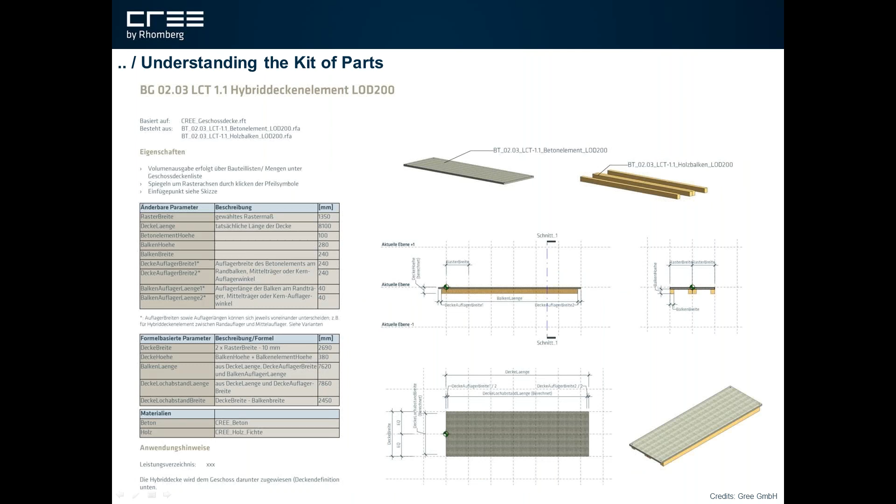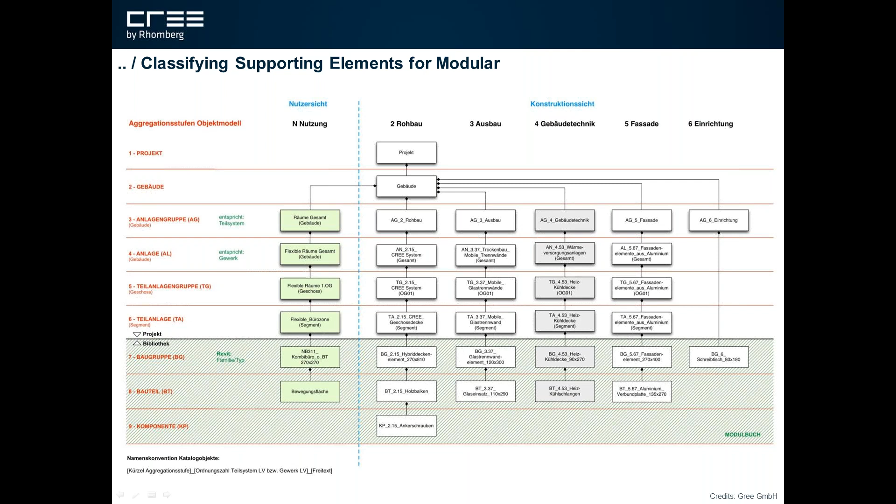We prepared documentation on how to use these parametric components and how they relate to each other. We had to be able to name and sort our building blocks, and therefore we created our own classification, as prefab and hybrid has not really been captured so far by available classification systems.

We started sharing a conceptual variant via the BIM Object Cloud service, and we use the same platform internally with our partners to distribute more detailed content depending on the country. Preferred and tested suppliers can then be added to the recipe.

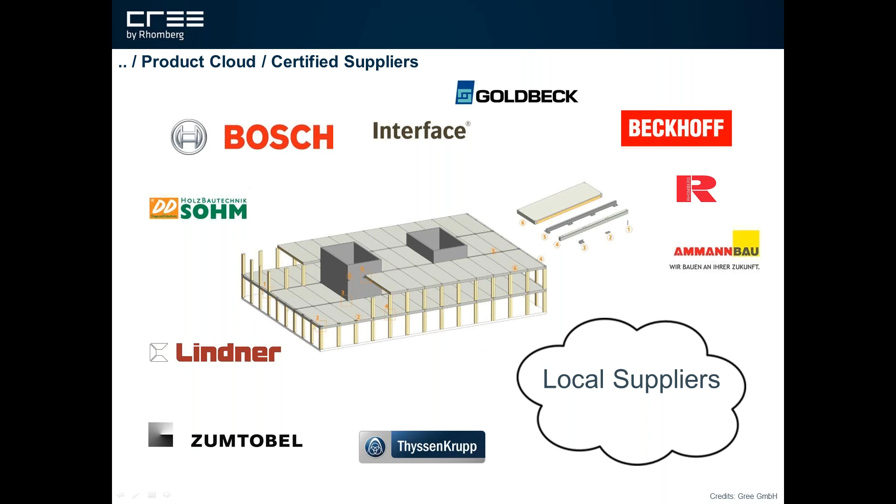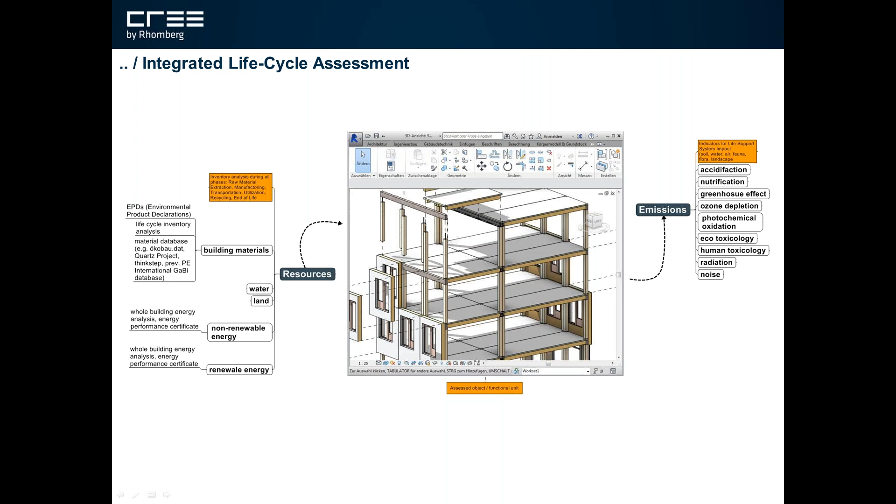Design integrated lifecycle assessment is another concern to us, as we would love to base our design decisions on instant feedback of environmental impact. We have used and tried different approaches for implementing this as a design decision-making feedback loop during design, as well as a rating system compliance tool for LEED, DGNB, or Living Building Challenge.

We built dashboards inside our BIM data hub, Revit in this instance, using schedules to calculate building weight, material input per net usable floor area, and CO2 equivalent. We used simple scripting to connect to mainstream Excel, as well as purpose-built software plugins where it made sense. LCA is simple math, but to integrate it into the rather unpredictable architectural design process is another challenge.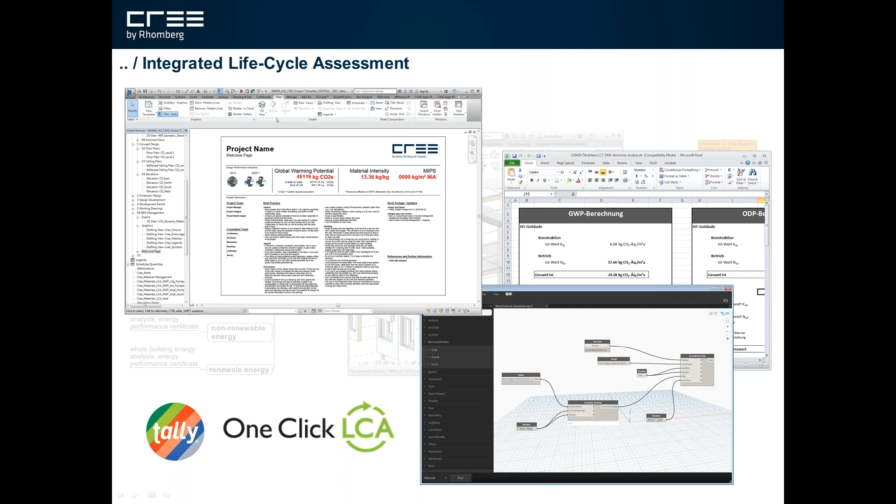This is a project that is close to my heart, and I'm rather excited when I can tell you more about it at a deep dive follow-up webinar in spring 2018. Finally, we packaged our perspective on virtual design and construction to help us all work effortlessly as a team towards our vision of providing zero impact buildings.

We're now almost at the end of our first webinar. How am I doing with time? We've got around 10 minutes left. We hope that we have planted some seeds and made you curious for more.

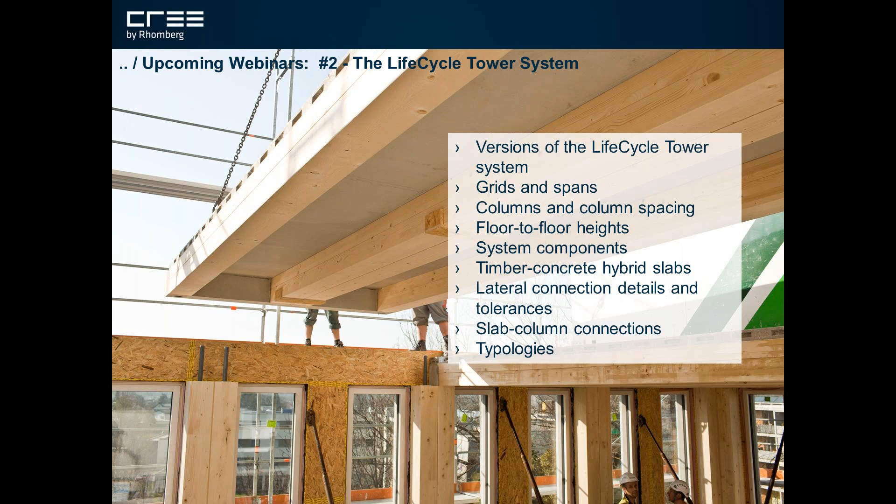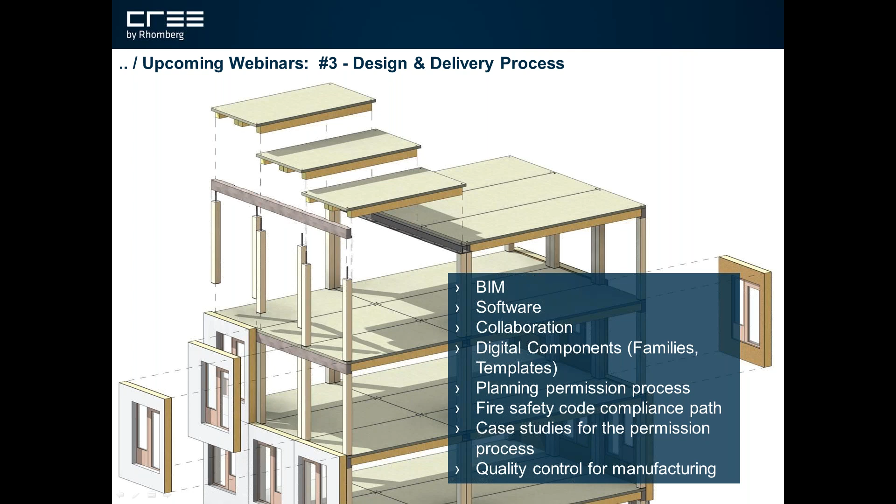So in the third webinar, we will talk a lot about implementing software, processes and standards, and also have a closer look at some case studies and look at quality control for manufacturing processes, as well as the fire safety compliance path that we choose for our projects.

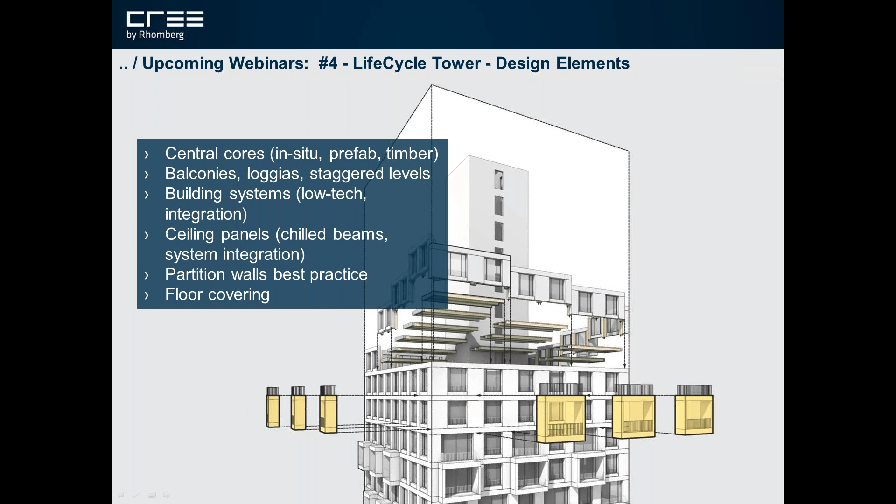In webinar number 4, we'll look at design elements that are not part of the core LCT system. So we'll look at options for central cores, in situ concrete, prefab, or timber, balconies, loggias, staggered levels, integration of building systems, partition walls, best practices, and so forth.

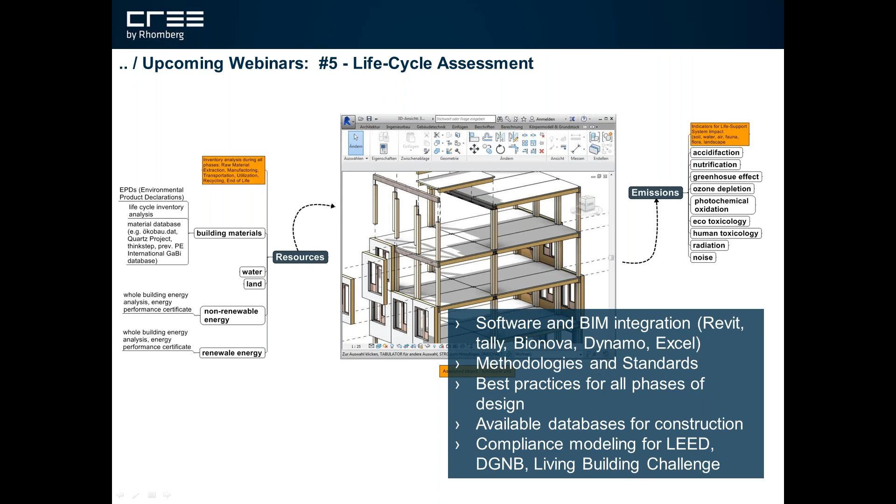Webinar number 5 is the LCA deep dive session that I talked about before. So we look at software and BIM integration, methodologies and standards, best practices for different phases of design, and which databases make sense for which country.

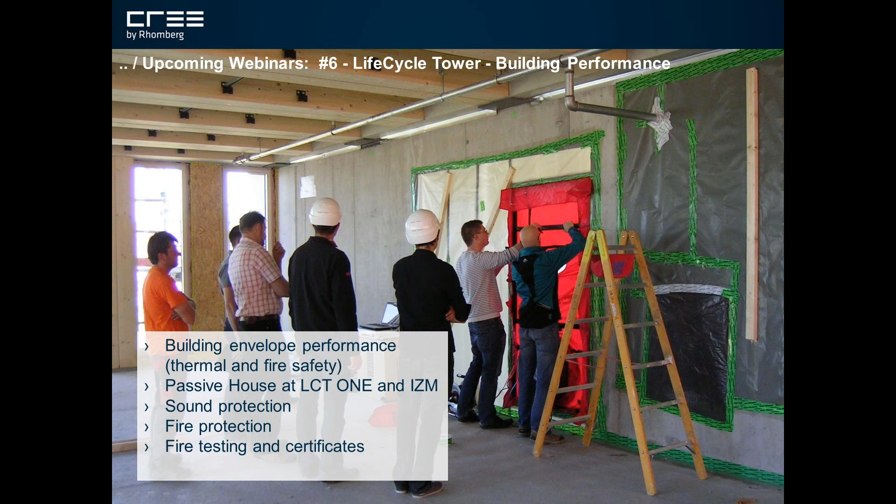And we look also at compliance modeling for different rating systems. The last planned webinar, number 6, will look at building performance, mostly building envelope performance and thermal performance. A lot of it will be related to passive house at the LCT ONE and at the IZM. We'll also look at several sound protection issues and how we solve them, as well as fire testing and certificates.